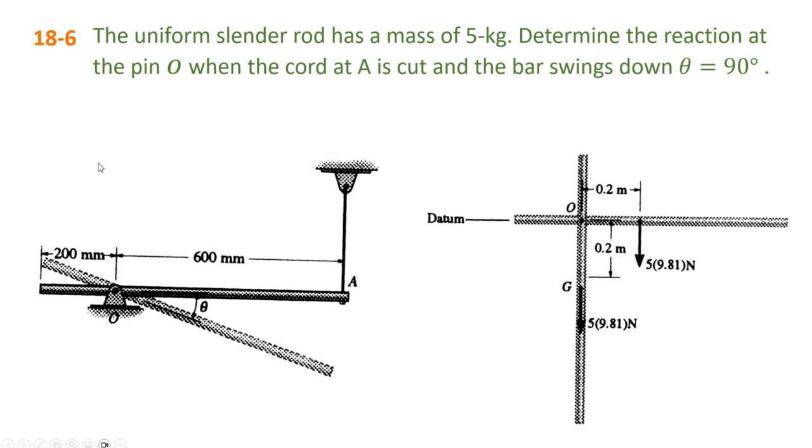So to do that, we need to find either the omega or the alpha. We don't have either. We know that omega 1 is equal to 0, but we don't know what omega 2 is. And we start to do the calculation for this situation. So start first by applying the conservation of energy equation for this one. We need to find T1, V1, T2, and V2.

You have to know that actually in this scenario only the weight is going to do work, so V1 and V2 can be found. The first one is going to be 0, the other one is going to be the weight multiplied by minus 0.2. So this will be easy. We just found the value for the V's.

Now for the value of T1 and T2, we need to find IG first, and then we're going to apply the equation to have it in the form of omega. Omega 1 is 0, so T1 is going to be 0, T2 is going to be in terms of omega, and thus I'm going to be able to find the value for omega. Later, we're going to apply the free body diagram to find the reactions on the x-axis, the y-axis, and the moment around the point O.

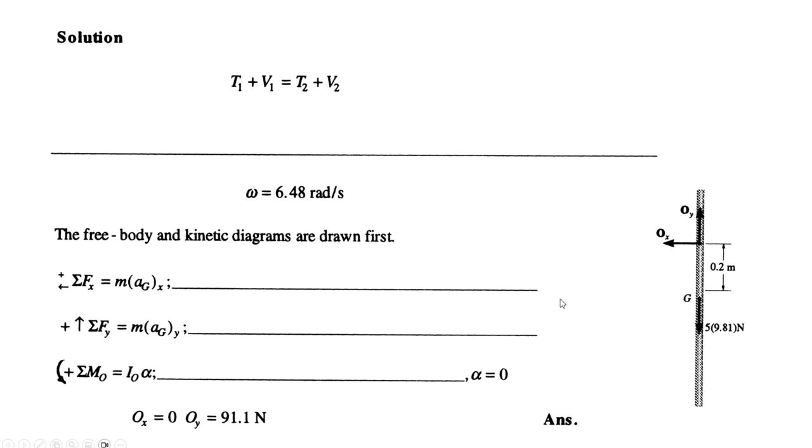To do that, we need to apply the kinetic diagrams. The answer is going to be alpha is 0, omega is 6.48, Ox is 0, and Oy is going to be equal to 91.1 Newton. So we are going to find first that the rod undergoes rotation about the fixed axis through the point O. The equations of motion can be used for solving for the x direction reaction at O and the y direction reaction at O.

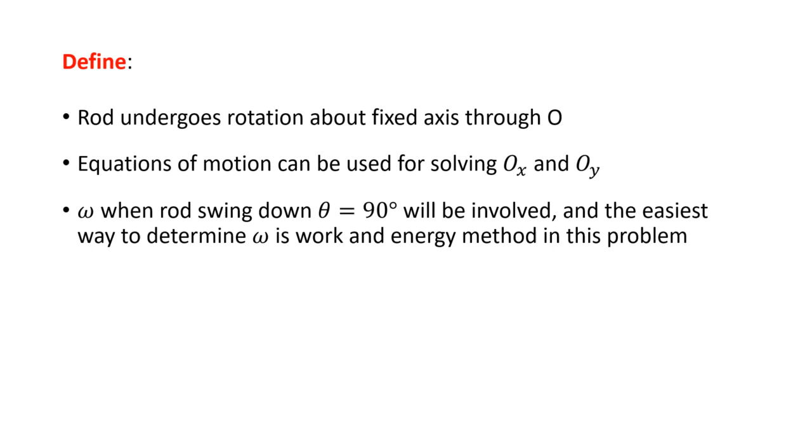And the omega, when the rod swings down to theta equal to 90, will be involved, and the easiest way to determine omega is going to be the work and energy method in this problem. So once again, this will be my free body diagram for state 1 and state 2. So you can see that the point G will drop by a value equal to the distance OG in the y direction negatively. That will be the delta y.

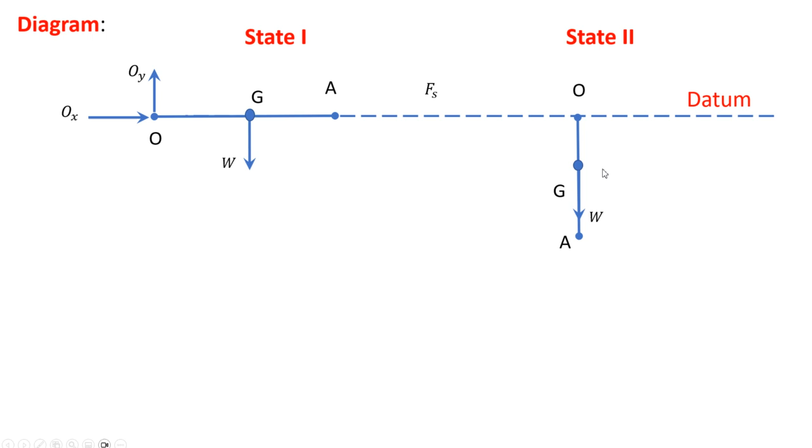And in this position at the beginning, we know that omega 1 is equal to 0, but we don't know omega 2 in the second situation. So we are going to sketch also the free body diagram and the kinetic diagram. So this was the free body diagram in the position at 90 degrees. The weight is going downward. The reaction in the y direction at O is going upward. And for the x-axis, Ox going to the right.

And in the kinetic diagram, we're going to have the mass multiplied by aGy, where aGy is going to be the normal acceleration, or omega squared multiplied by r, and the tangential acceleration is going to be aGx, or m·aGx, where aGx is going to be the tangential acceleration, which is going to be alpha multiplied by r.

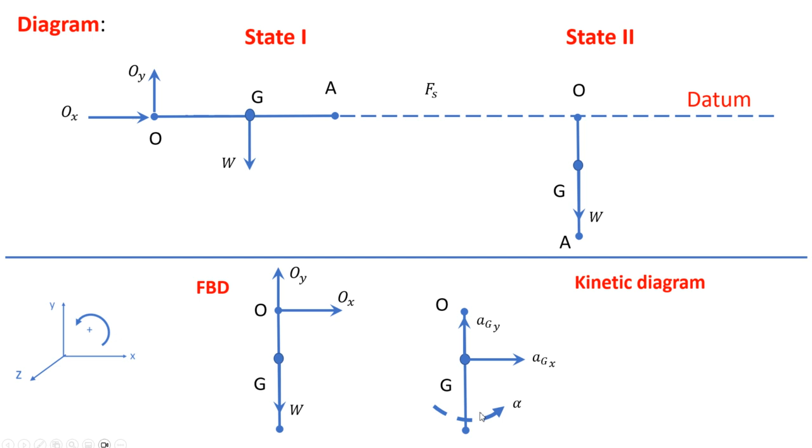And finally, we're going to have the alpha, which is going to be in the counterclockwise direction. So we're going to set the knowns, which are going to be the mass, the omega 1 is 0, the theta 1 is 0, theta 2 is 90, and we need to find the omega 2, the OX, the OY, and the alpha.

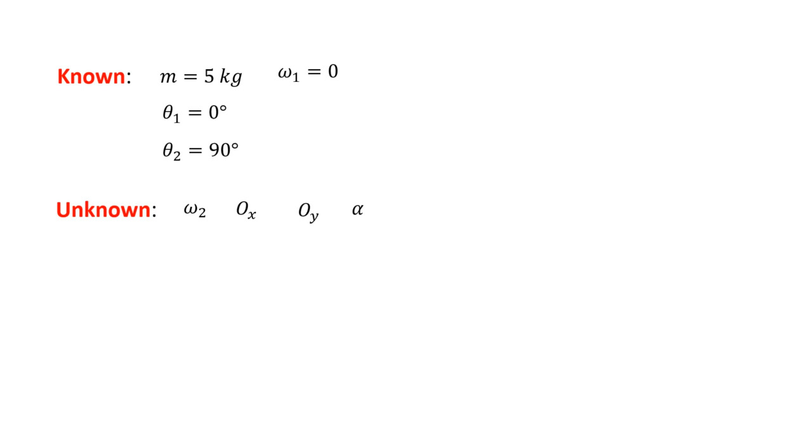So we start with the equation first, the conservation of energy. So the T1 plus the V1 equal to T2 plus the V2. We should know that only the gravity force does work, and we're going to find the value for the omega 2. Then we're going to substitute in these three equations to find the OX, the OY, and the alpha.

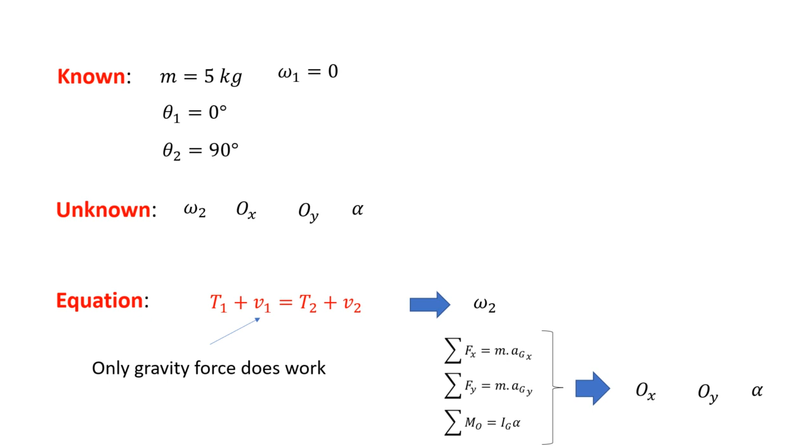So we start with step number 1, find the Ig, which is going to be, of course, 1 over 12 mL squared. And we know the mass, we know the L, and we can find the value to be equal to 0.2667. Now we start to do the calculation.

That's the T equation, half of the mass multiplied by the Vg squared, plus half of the Ig omega squared. Well, the VG, of course, is going to be equal to 0.2 omega, and thus the equation can be rewritten by replacing the Vg by the omega multiplied by the R G/O. That's all. Okay. Plus half of the Ig omega squared.

Now we're going to find the T1 and the T2. T1 is going to be 0 because the omega is equal to 0 at state 1. The omega 2 is unknown, but we're going to write it down in this equation. Substitute the R with the 0.2 and the Ig with the 0.2667, and we will come out to the value of 0.233 omega 2 squared as the value for the T2.

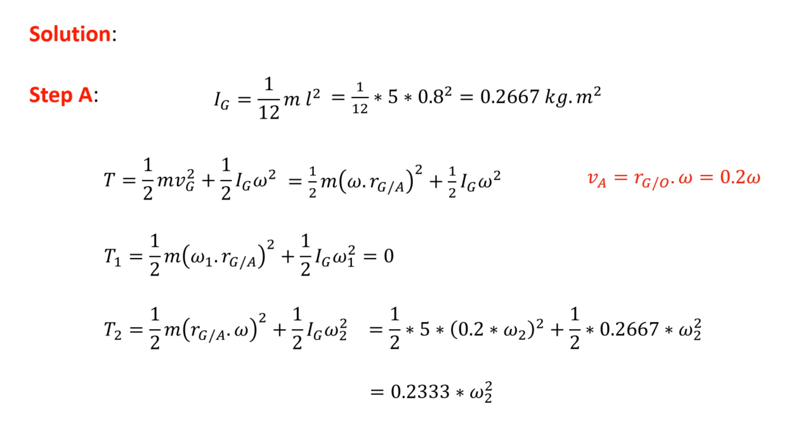Now we come to the work done by the weight. So the V1 is going to be equal to the weight multiplied by the Y1, and the V2 is going to be equal to the weight multiplied by the Y2. The Y1 is 0, so the V1 is 0. The Y2 is minus 0.2, and we can find the value for both V's. The first one is 0, second one is negative 9.81.

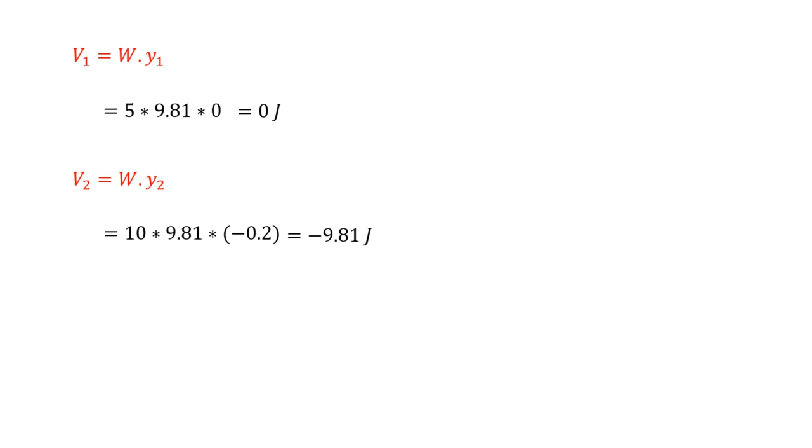Now we're going to put everything in the equation of the energy conservation, and we will find out that the omega 2 is going to be equal to 6.48 radians per second. That's it. Now we finished with the first solution.

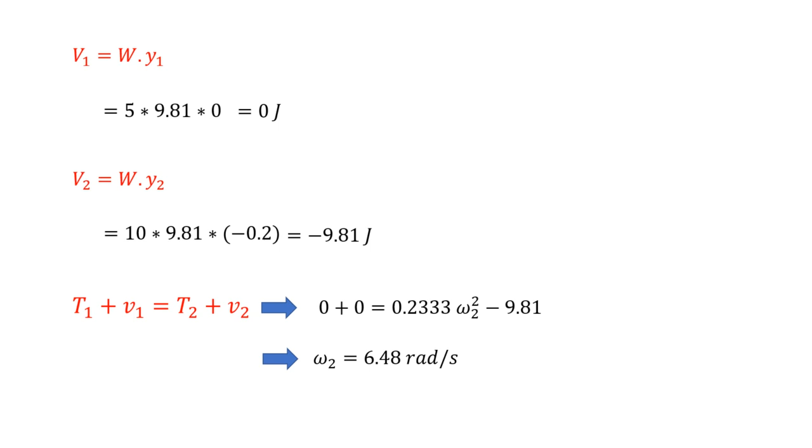Now we are going to put everything into the other equations by using the free body diagram and the kinetic diagram. So first calculate the IO, because rotation is going to be around O. It's going to be equal to the Ig plus the mass multiplied by the Rg/O squared, and this will give me the value to be equal to 0.4467. The AGY is the normal, the omega squared multiplied by the RG/O, and we'll find it as 8.398 meters per second squared. The AGX is going to be 0.2 multiplied by the alpha.

For the x direction forces in the free body diagram, we have the OX, and in the kinetic diagram, we have the M AGX. OX is going to be equal to alpha because it's 5 times 0.2, which is equal to 1, so it's going to be alpha. The y direction forces are going to be the reaction O in the y direction minus the weight, and this will be equal to the mass multiplied by the acceleration in the y direction. So the OY is unknown, the weight is known, the AGY is known, the mass is known, so I can find that the OY is going to be 91.1 Newtons.

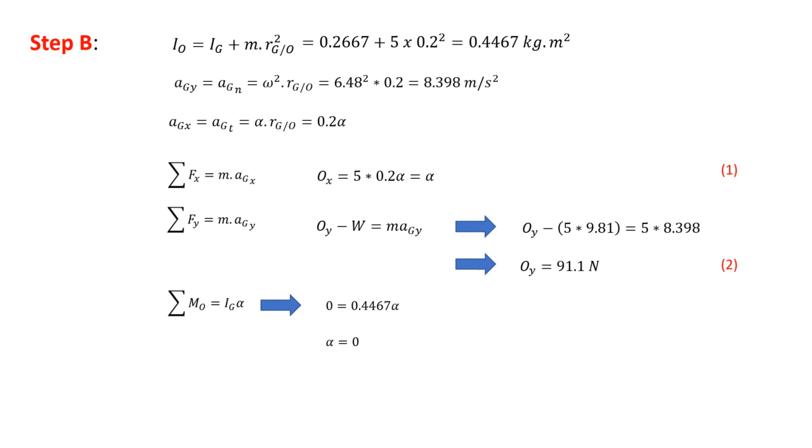Finally, we are going to come to the moment around the point O. It's 0. You don't have any force in the kinetic diagram. Okay, no moment is going to be caused by any force around the point O. So we will find that the I alpha is equal to 0, or the alpha is equal to 0. That's it. It's very simple. It's not complicated, it's quite a simple equation. You only need to know what to find and how to find it.